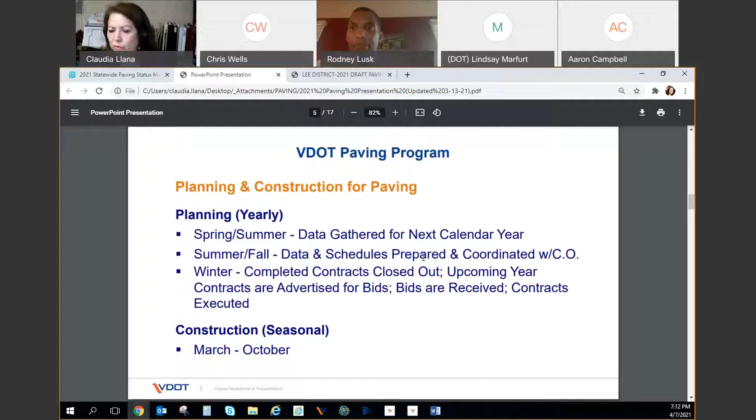So when the weather turns better, like right now with no more freezing, is when the actual repaving begins. Typically it goes from March through October, sometimes November, with actual paving normally beginning in April. Before that period is when we have our pre-construction meetings and review the bids and finish the contracts.

So how do we select roads for paving each year? Those selections are based on several factors. One of the most important is the condition of the pavement, which I'll show in the next slide. Another is traffic volumes—roads with the highest volume, such as interstates and primaries, get a little more attention.

Another thing we keep in mind is if there's a big utility project planned, we avoid paving in that area to prevent tearing down the pavement when the utility project comes along. We also try to group contracts into neighborhoods so we eliminate contractor driving around, preferring they spend their time actually paving. This includes economies of scale and minimizing mobilization costs.

Another factor we incorporate is feedback from our maintenance crews. Our crews are out there every day doing their usual maintenance work, looking at drainage systems and patching potholes, and they're the most familiar with the road conditions they see. We have several area headquarters throughout the district, each specializing in a geographical area, and they become very familiar with their area—their input is very important to us.

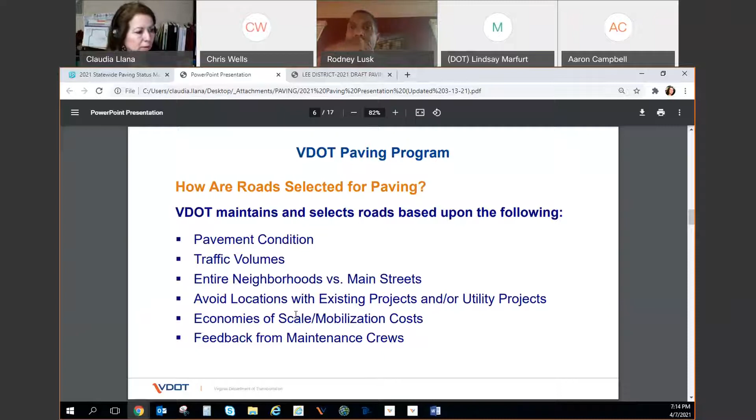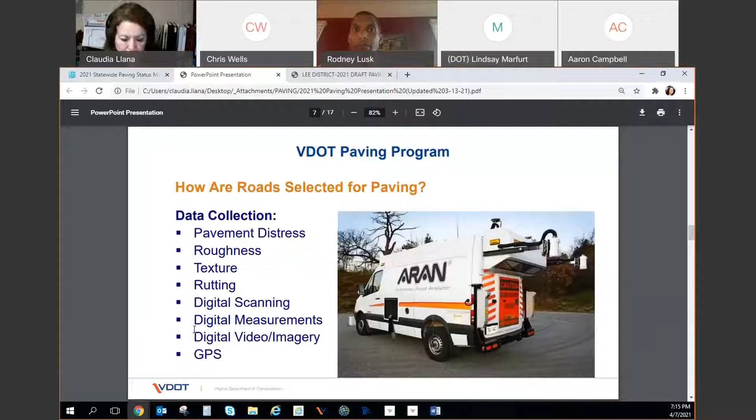Okay, so how do we collect the data? Every year we have a contract where the contractor uses very specialized equipment. It's GPS enabled, with cameras underneath, to the sides, and in front, able to detect information about pavement condition, including rutting and pavement distress. All of this information is gathered digitally and sent to our paving experts who pore over the data. As I mentioned, at this time of year we're already planning for next year, and they're already beginning to see what the data collection is showing.

Okay, based on this data that comes from the field, our scientists look at rating the condition of the pavement. We use something called the Critical Condition Index. This system was developed by the Army Corps of Engineers many years ago, and we find that it works very well, so we have adopted it. The Critical Condition Index varies between 0 and 100, with 100 being excellent condition.

As you can see in this slide, we provided a color coding, which helps us identify, as we map these conditions, the areas where the roads are in excellent, good, or fair condition. Colored here as green to light green into yellow, or roads that have a Critical Condition Index below 60, which are the ones that we target for repaving and fixing, because their condition is poor, very poor, or below.

On the right, you can see some pictures of what those conditions look like. Excellent paving condition, between 90 and 100, looks nice and smooth. Poor condition, which is below 60, you can see some distress on the paving. And a very poor condition, you see potholes and rutting and a lot of problems that drivers can notice as they're moving around on these roads.

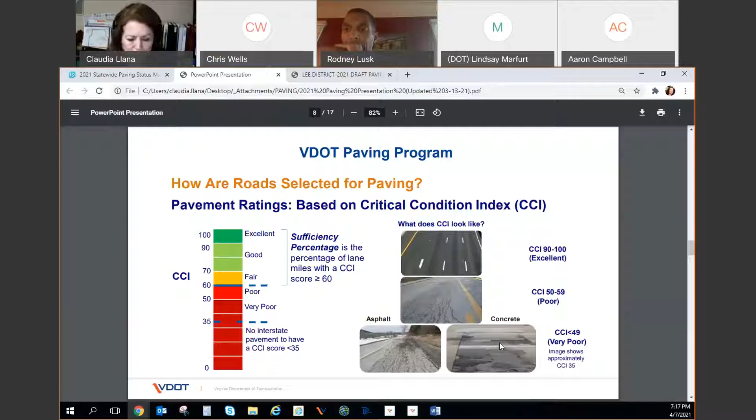So how frequently do we collect this data? For interstate roadways like 66 and 95, we do this annually. Similarly, for primary roads like Route 1 and those with numbers below 600, we also collect those annually.

Secondary roads are the most abundant, and we do about 20% of them each year. Secondary roads include small subdivision roads, roads that you drive on every day, with route numbers of 600 and above considered secondary roads. Since we can only inspect about 20% each year, it takes us about 5 years to cover all of the secondary roads.

Now, beginning this year, we're treating the high volume secondary roads, such as Braddock Road, that have average annual daily traffic of 3,500 or above, as if they were primary roads, and inspecting them annually.

This slide shows the performance goals that we seek for the different road systems: interstate, primary, or secondary. For the high traffic volume roads with ADTs above 3,500, we look for sufficiency ratings, or CCIs, above 60 for 82% of the roads. For those roads that have lower traffic volumes, less than 3,500, we vary. For primary roads, our goal is 75%, and for secondary roads, it is 60%. That is percent of the network with CCI of 60 or better.

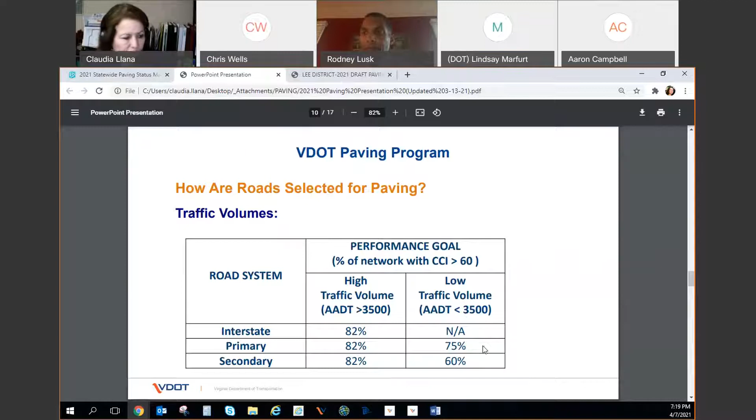This slide is what I call the dashboard, which basically tracks the performance of the different road systems over the years. The color codes we're using: interstates are in red, and you can see that between 2012 and 2013 they improved quite a bit and have continued to increase up to 2018. They have dropped slightly in the last 2 years, but their percentage at our goal of 82%, we're still meeting that goal. In fact, we are just above that, at 83% sufficiency rating in 2020.

For the primary roads, it has gone up and down a bit, but as of this year, every time we have been meeting our performance goal above 82%. This year, we are at 83%. Secondary roads, on the other hand, we started off doing very poorly. Back in 2014, the percent sufficient road was only 30%. As you can see in this graph, that has improved over time, and by 2020 we are almost at our 60% sufficiency rating.

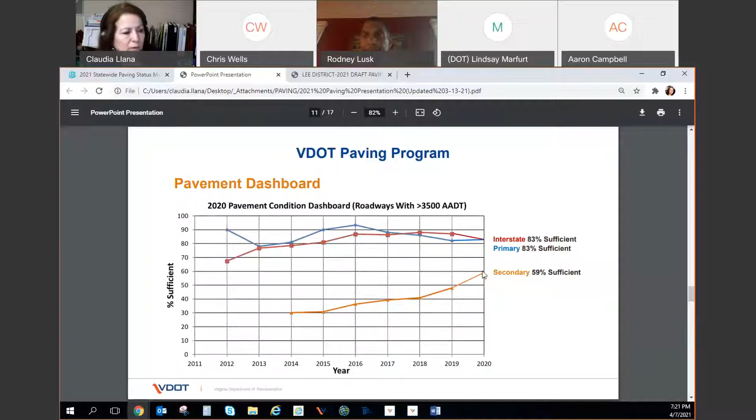In this slide, I include several different types of pavement treatment that are applied to the roads. Preventive maintenance is applied when the road is not in as bad a condition; it extends the life of the road. We apply something like slurry seals. We also do some patching, which is more than filling potholes, because it's done with hot mix, not cold mix, repairing all around the area that needs the patching. We also do corrective maintenance, where we use plant mix and mill and overlay less than 2 inches, applying surface mix asphalt after it has been milled.

For roads that need a little more care, restorative maintenance, we mill a little deeper, 2 to 4 inches, then overlay with intermediate mix asphalt, 2 inches. And above that, we apply just under 2 inches of surface mix asphalt.

Full depth reclamation, or FDR, is used on roads that are in very poor condition. This is essentially reconstruction. It's very rare, and sometimes we combine it with another project. For example, the Rolling Road project, we're widening, and as part of the project we've included doing a full depth reclamation of that pavement and then widening. That's basically excavating everything that's there, the existing pavement, going down 6 to 8 inches for stabilization, and then applying 2 to 4 inches of intermediate and surface mix asphalt.

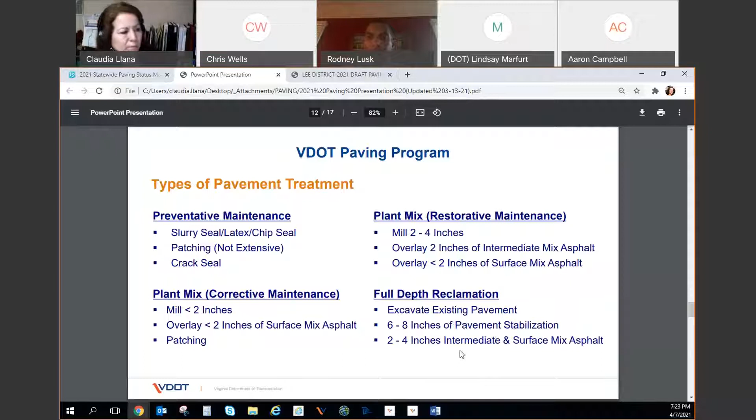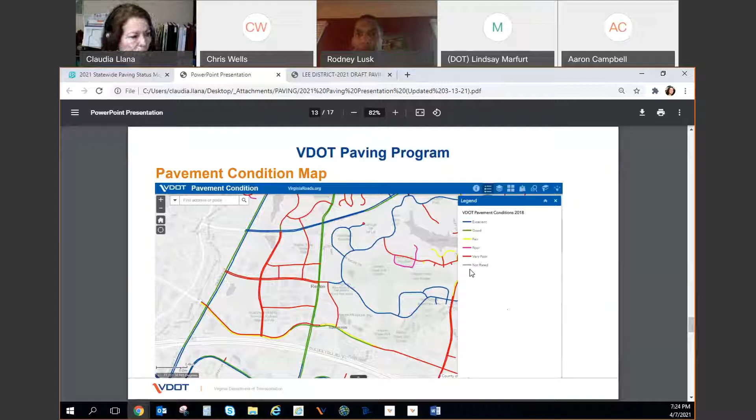This map shows the paving status map. Basically, it shows the roads that are going to be paved in that particular year. I'll tell you that the 2021 statewide paving status map has already come out, and I'll go to it briefly in a minute, but let me first explain the color coding that is typically used.

The ones that are in the schedule are shown in red. Those that are in progress or are getting paved at the moment are shown in green, and this is updated very frequently once the paving season begins, such as now. Those roads that have been completed are shown in blue.

One thing you can do if your road is in the paving map for that particular calendar year, or if you're interested in who's doing the work, is zoom into the particular road segment. A window will open giving you the name of the project manager, his phone number and email, so you can contact that project manager if you want information about a particular road segment.

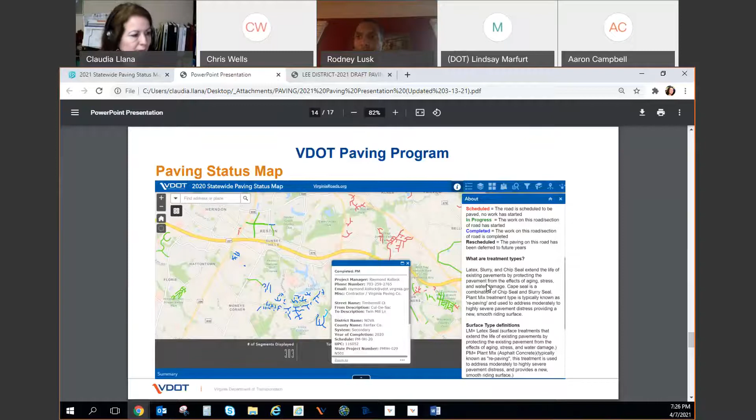Chris mentioned how pavement markings vary depending on the road. We have a blank canvas, and we can either return the pavement markings the way they were before paving, or in kind. Occasionally, we include minor adjustments, such as moving the crosswalk a little bit or using high visibility markings in particular locations after analysis. We may add edge lines.

Occasionally, we go a little beyond that and do things such as lengthen a turn lane or create a new turn lane. Those projects have to be thought of ahead of time because they involve adding not just milling and overlaying, but possibly making sure the paving handles the new traffic, so it may need full depth paving, not simply mill and overlay.

VDOT coordinates with Fairfax County DOT, and you will hear more about this. We collaborate very closely. As soon as we have a draft paving map, we start the coordination so that Chris and his staff can evaluate some of the different treatments he will be talking about, such as road diets, bike lanes, improved sight crosswalks, or new crosswalks sometimes.

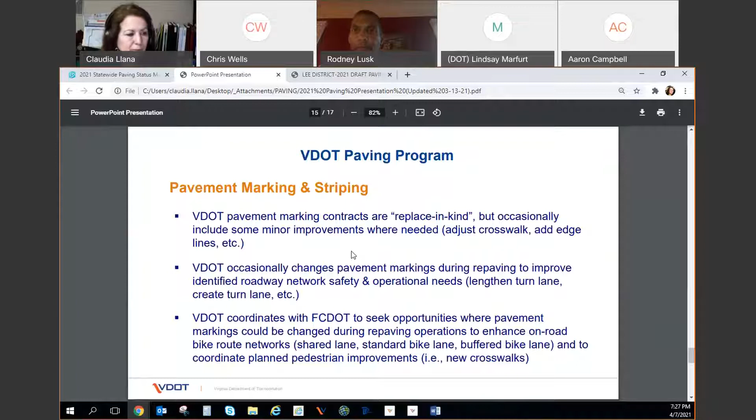In this slide, I'm showing some of the resources available to you, not just on paving, but on different things you may have a request or inquiry about from VDOT. If you want to report a road problem or a maintenance request, including things such as a sign that's been knocked over, bushes or vegetation covering sight distance, or a pothole, you can call 1-800-FOR-ROAD, which is 1-800-367-7623. This is a customer service number that is always manned, 24-hour customer service.

You will get a ticket number so you can track it. You can also go online at MyVDOT, which is https://my.vdot.virginia.gov, and enter your need there, report a problem, or even sometimes make comments if you wish.

The maps I mentioned earlier, both the pavement condition map and the paving map, which now has the 2021 paving map available, can be found online at virginiaroads.org. Search web maps and you will find those two maps. There's a lot more information here, including crash data, speed limits, and other things, if you're inclined to collect data.

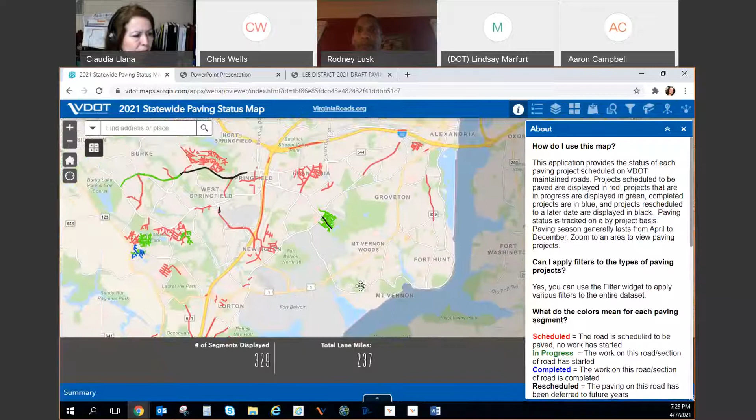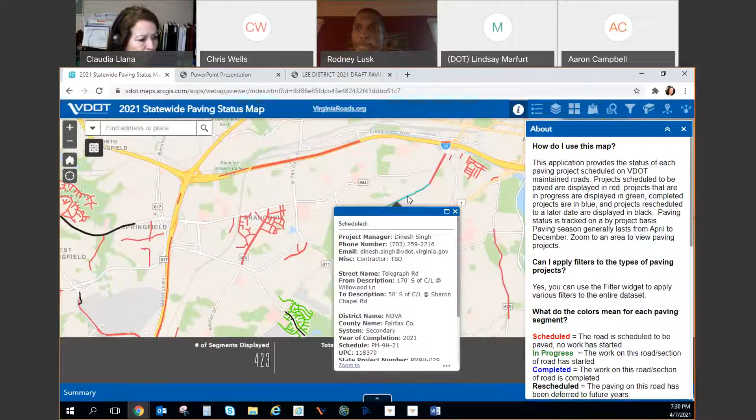Now I'm going to go briefly to the current statewide paving map. Here's a view, I hope you can all see it on your screen. I mentioned earlier that you could zoom in and get very close to a road you may be interested in. This one is Telegraph Road, I just happened to pick this one. It tells you who the project manager is, Dinesh Singh, and gives you his phone number and email information.

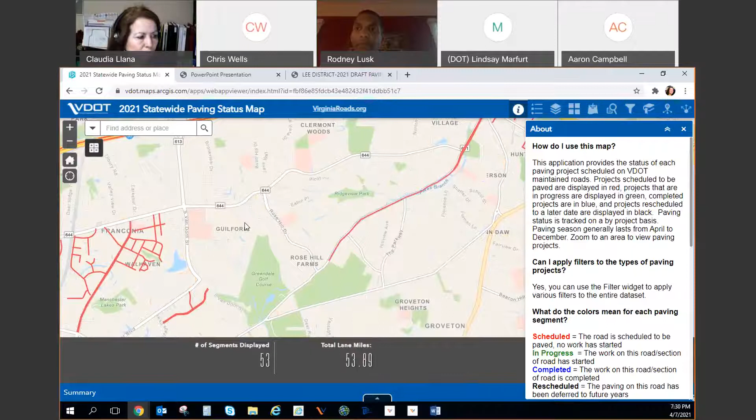So that would be one way to track if your road is in the paving program, whether it has been completed or is still in progress. What to expect if your road is in the paving program: the contractor will put out signs on the side of the road, or sometimes door hangers, letting you know when you need to move your vehicles out of the way so that paving can happen. That is the first sign that paving is about to happen in your neighborhood.

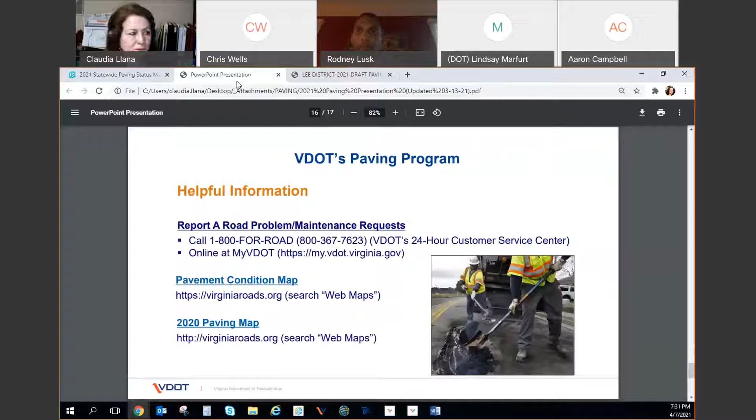Again, my name is Chris Wells. I'm in the Fairfax County Department of Transportation, the Active Transportation Program Manager. Active transportation is the current industry jargon for pedestrian, bicycle, and other rolling human-propelled transportation, such as wheelchairs or scooters.

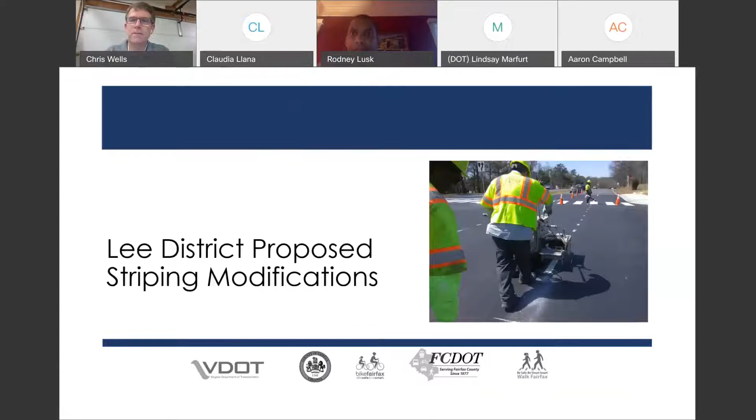I'll talk tonight about the proposed striping modifications for the Lee District in 2021. I'll go over exactly what it is I'm talking about, and then we'll take your questions at the end. As I said earlier, we've had this relationship with VDOT for over 10 years now, where we look at the draft paving information in the fall.

We're basically trying to identify roads that are excessively wide and have the opportunity for bike lanes to be striped, or in some cases a 4-lane road that doesn't need the traffic capacity of a 4-lane road could be narrowed to a 2-lane road for bike lanes, and again, for improving traffic behavior.

The reason we do this is because the county has an economic development goal of creating bikeable and walkable areas of economic development. To be able to get to those areas on your bike, you need to be able to bike throughout the county.

Since this has been going on for many years, we've really had a lot of success in this program. We've picked up a couple hundred miles of bike lanes throughout the county, and the network is really starting to come together with our off-road trails and our on-road bike lanes.

The most interesting thing, and the best thing about this process we're talking about tonight, is how cost effective it is. When we build trails or sidewalks, they are very expensive.

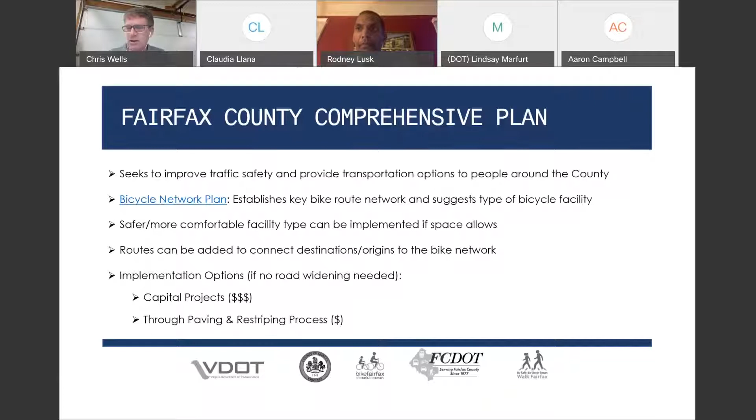It's literally the most efficient thing that I'm involved with in trying to improve things in the county. Why are we doing this?

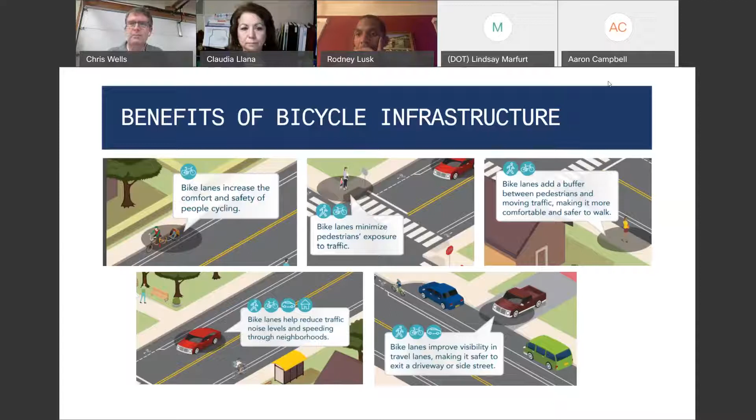And why does that matter? When lanes are wide, drivers don't have to pay as much attention. They don't have the need to control themselves, so there's an ability to not pay as much attention. But psychologically, it makes them feel they can go faster because there's nothing in their way.

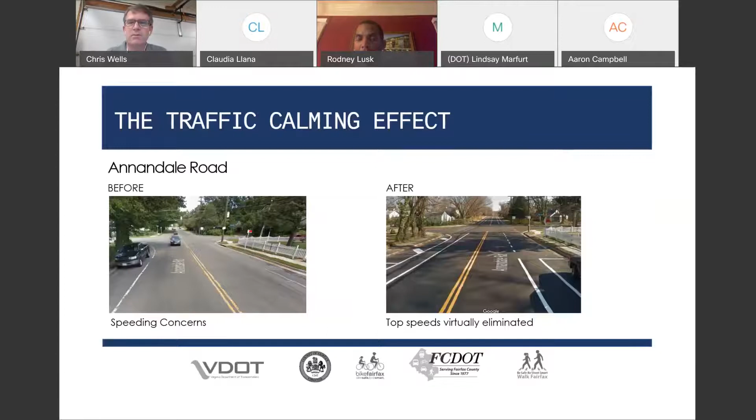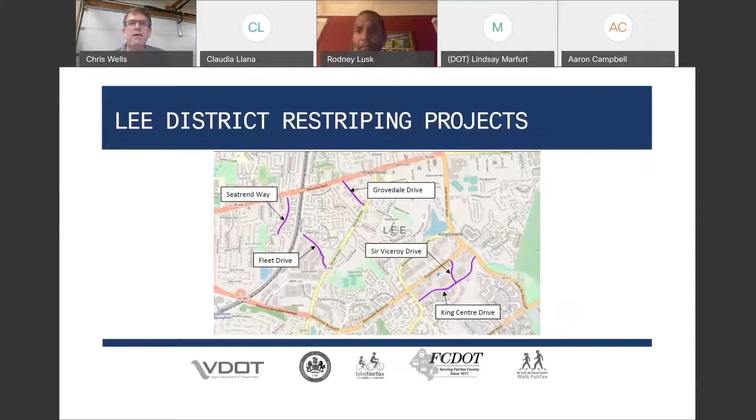So here we are in Lee District tonight for 2021. Over the years we've done different roads throughout the county, and it's all dependent on what's being paved. There are actually a few roads this year in Lee District to build off of what we've already done: Seatrend Way, Fleet Drive, Grovedale Drive, Sir Viceroy Drive, and King Centre Drive.

The first one is Fleet, from Yadkin Court to Beulah Street. It's essentially today 3 travel lanes with a center turn lane. It has a sidewalk on both sides for some of it, not along the railroad tracks, with on-street parking on one side and no on-street bike facilities.

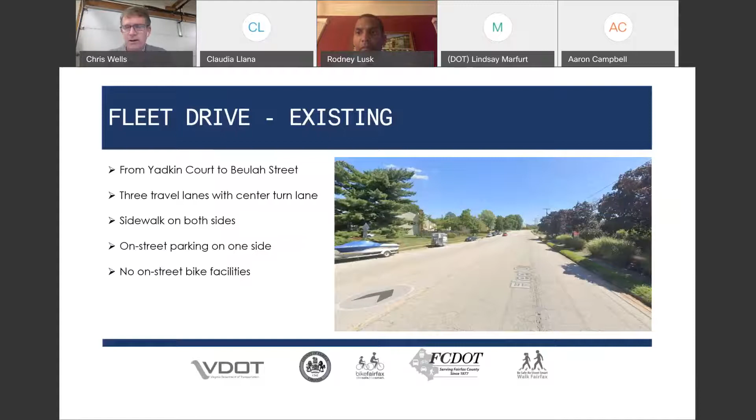The after proposal would be something like you see in this graphic. We'd have 2 travel lanes, bike lanes, and a left turn lane or center turn lane that would be better engineered than is on Fleet today. We will maintain the legal on-street parking. We know parking is critically important, both from a capacity point of view and also from an equity point of view, so we're very sensitive to maintaining parking.

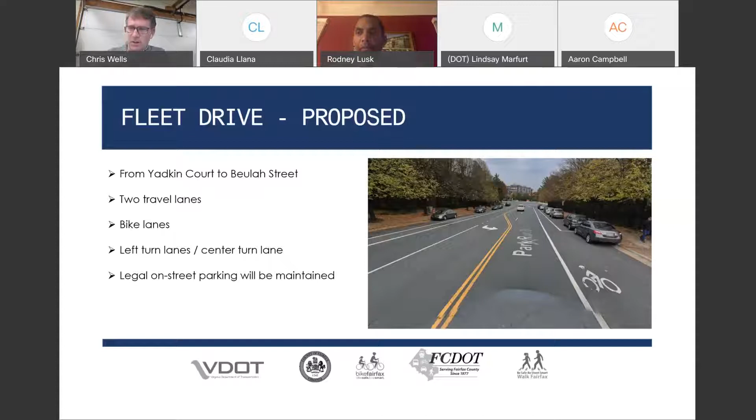We're often asked, will all the parking be maintained? We do need to say it's legal parking, because when we add striping like this, we're not going to stripe parking next to a fire hydrant or a transit bus stop. So if a street's totally parked today, the honest answer is yes, there would probably be a couple spaces lost. But again, it's a much more organized and much better outcome for the community.

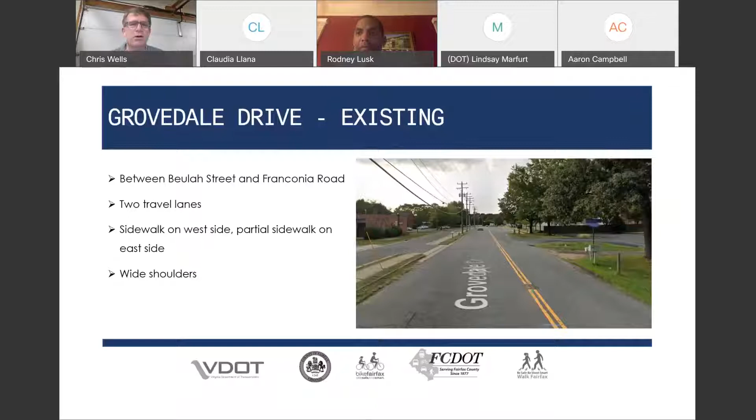The next street is Grovedale Drive, between Beulah Street and Franconia Road. The current conditions are 2 travel lanes with a sidewalk on the west side, a partial sidewalk on the east side, and wide shoulders. The proposal would simply be to restripe those 2 travel lanes with bike lanes, and then there's a wider section where we would have a left turn lane.

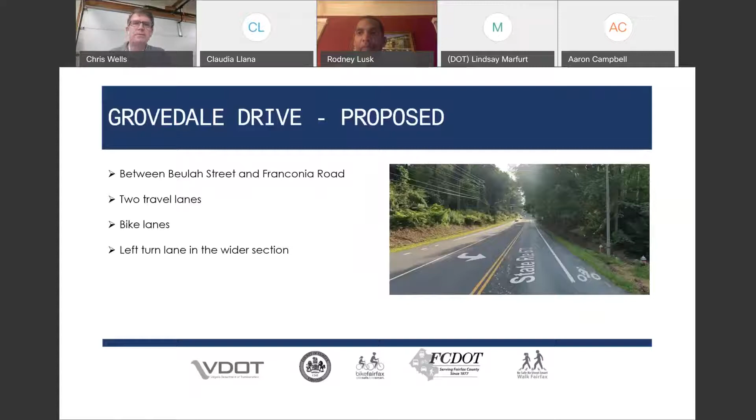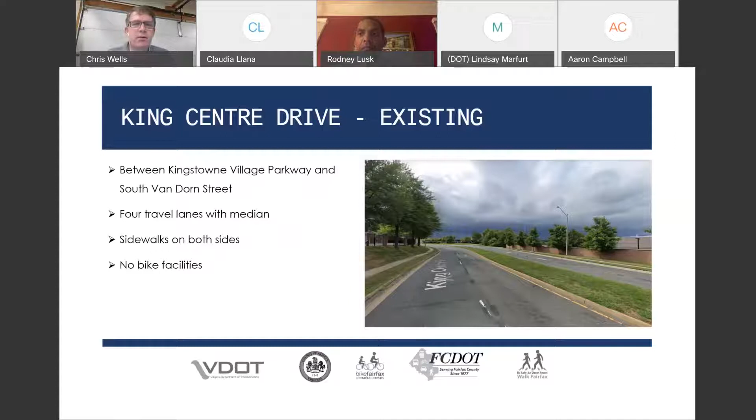King Centre Drive in the Kingstown area, between Kingstowne Village Parkway and South Van Dorn Street, is a 4-lane divided roadway with median and sidewalks on both sides and no bike facilities. The proposal would be to convert that to a 2-lane road, since this road does not have the traffic volumes that need to be supported by a 4-lane cross section.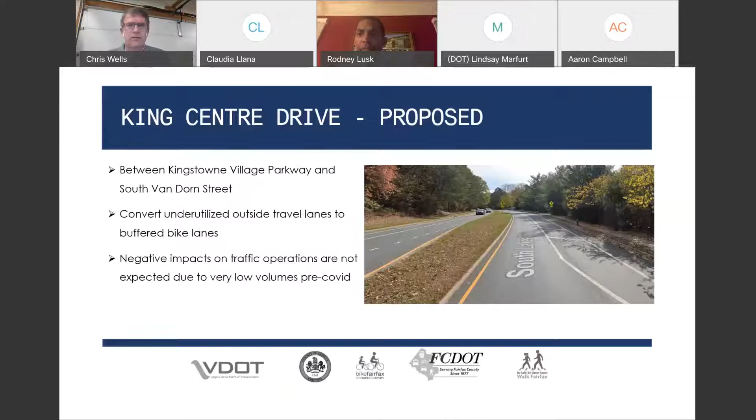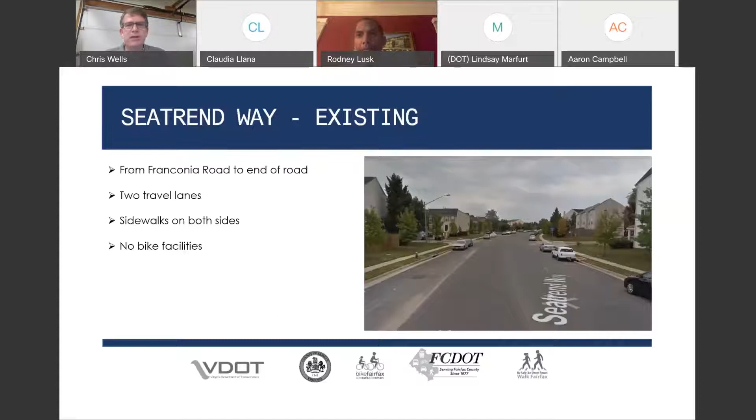Seatrend Way, from Franconia Road to the end of the road, is currently 2 travel lanes with sidewalks on both sides and no bike facilities. The proposal would be to add a center line, bike lanes, and parking lanes. Again, all the legal on-street parking would be maintained for Seatrend.

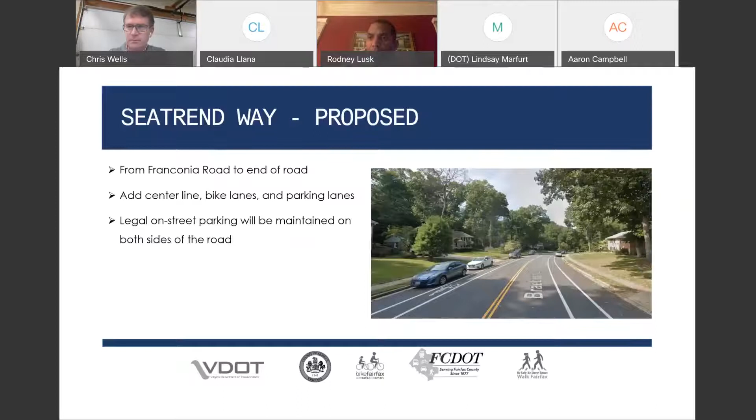Sir Viceroy Drive, also in the Kingstowne area, from King Centre Drive to Kingstowne Boulevard, is a 4-lane undivided roadway with 4 travel lanes and a sidewalk on the east side and no bike facilities. The proposal for Sir Viceroy would be to convert that to a 2 travel lane road with a center turn lane, as you see in the picture, plus bike lanes in each direction.

The low traffic volumes that exist on Sir Viceroy are well below the threshold needed for a 4-lane road, so the road will function perfectly well as a 2-lane road, and be much safer for cars and drivers.

Last, but certainly not least, is pedestrian safety. As part of this process, our staff reviews the proposed paving list to see if there are locations that don't have crosswalks but have significant pedestrian generators, such as a school or a park. We also work with VDOT to improve the crosswalk markings.

In a very small group of cases, we might also want to add something like you see in this photograph, which is a pedestrian median refuge.

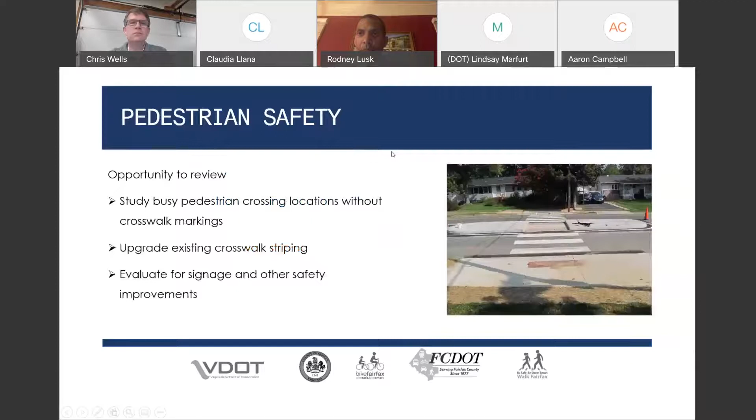I submitted a question in the Q&A. On the Sir Viceroy Drive slide, you mentioned a center turn lane, and the markings there don't look at all familiar to me. If you could pull that slide back up. The markings there do not look at all familiar for a left turn center turn lane. I see the dashes on there, but again, it doesn't look familiar. Is that compliant with Federal Highway Administration standards? I assume they have some kind of manual on that.

That's a very good catch on your part, sir. No, there should be opposing arrows in each direction showing that it's a dual-direction center turn lane. The way that's done is every few hundred feet or so there are back-to-back left turn arrows. And if there is a proper intersection, we would actually design a proper left turn lane to that intersection. But when you have random offset driveways and not a defined intersection, this concept of the center turn lane allows people to make those turns. But yes, there should be two opposing left turn arrows in each direction.

Spaced throughout that. The diagonal sign on the right-hand side looks like it's adjacent to a bike lane horizontal marking. That type of sign is unfamiliar to me too, it's normally around a bridge abutment. Yeah, that sign we call an object marker, and it's meant to indicate some form of hazard.

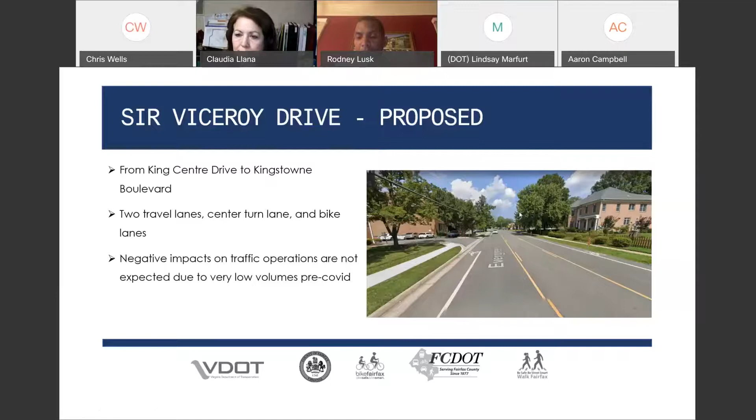Thanks, Chris. The next few questions, I think, are for Claudia. The first one is just a paving versus striping question. Will streets like Seatrend Way be repaved first before they are restriped?

Yes, I see that Seatrend Way is one of those that's going to be on the list for 2021 repaving, and yes, that will be done first. Then the striping will be put in place based on those engineering plans that Chris mentioned, if we're doing anything different than what was there before.

Thanks. The next question is, will South Van Dorn be repaved? There's a comment that it needs protected bike lanes to provide a connection between Telegraph and Franconia. So I'm looking at the list of paving roads, and I don't see South Van Dorn in this list for this year. So will it be paved in the future?

That decision will be based on the factors I mentioned, its condition, and what other roads in the neighborhood are going to need repaving. At that time, if that road is included in the draft plan for, say, next year or some future year, we would share the information with Chris and his team for their consideration about adding a bike lane. So I think that would possibly be considered in the future.